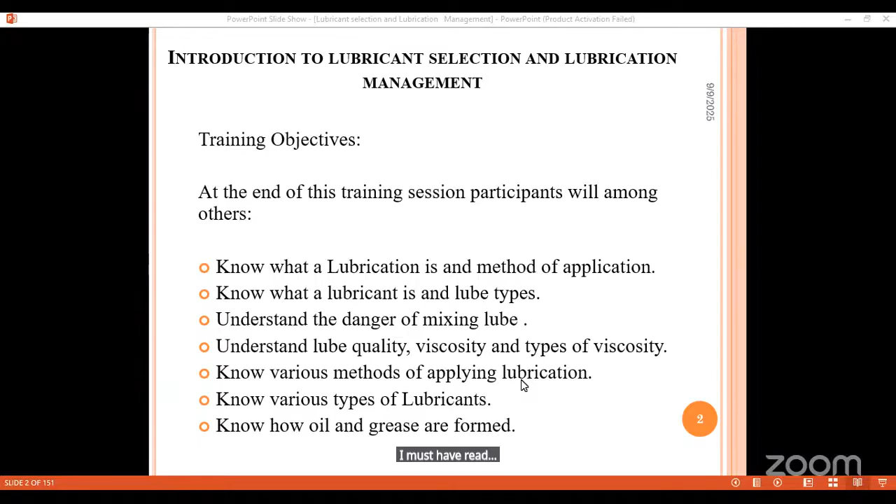Okay, so now, what is a lubricant? Or what is lubrication? Lubrication is the process of reducing friction and wear between moving surfaces in contact.

I will try as much as possible to break every word down so that everybody can understand it. When we say lubrication, we say friction. Friction means that force, that negative force, that retarding force that can make you as if you are going backward. It's like you are running, and maybe the wind is making your effort not count. That is what friction means here.

So there is friction in every machinery that is moving, that is rotating. So in order to deal with that friction, to remove that friction within the lubrication system, to make sure that friction is removed, we are not removing it totally, but we are trying to reduce it. And that process of reducing this is called lubrication.

It involves introducing substances such as liquid, gas, solid, and semi-solid or plastics to the mating area. How do I mean? Why are you saying solid? How can you use solid to store lubrication? We'll explain that later on, right?

Lubrication is the process or technique of using a lubricant to reduce friction and wear and tear in contact between two mating surfaces. Adequate lubrication allows smooth, continuous operation of machine elements, thereby reducing the rate of wear and preventing excessive stress or seizure of the bearings, all right?

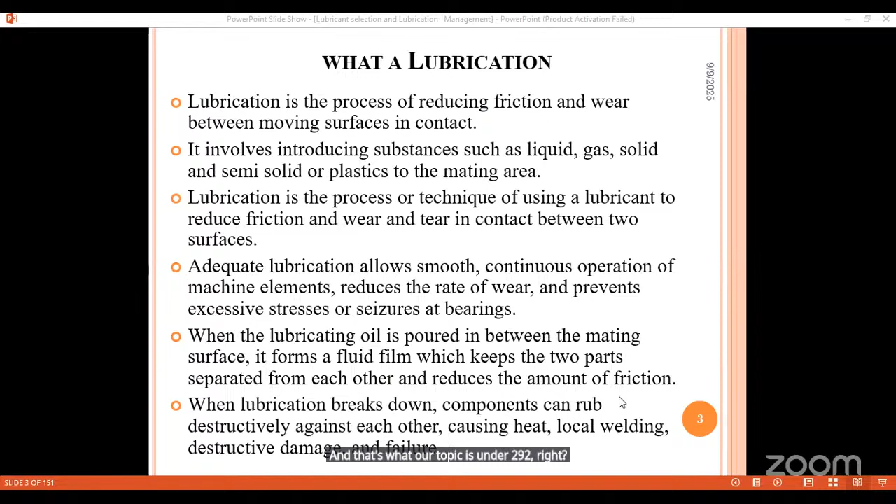Imagine a workplace without lubricants. Machines will grind to a halt, engines will seize up, and progress will stop. In this section tonight, we will talk about the complex world of lubricants, their classification, and selection, shedding light on the crucial role lubricants play in keeping our mechanical systems running smooth.

Hello, someone is talking at the background.

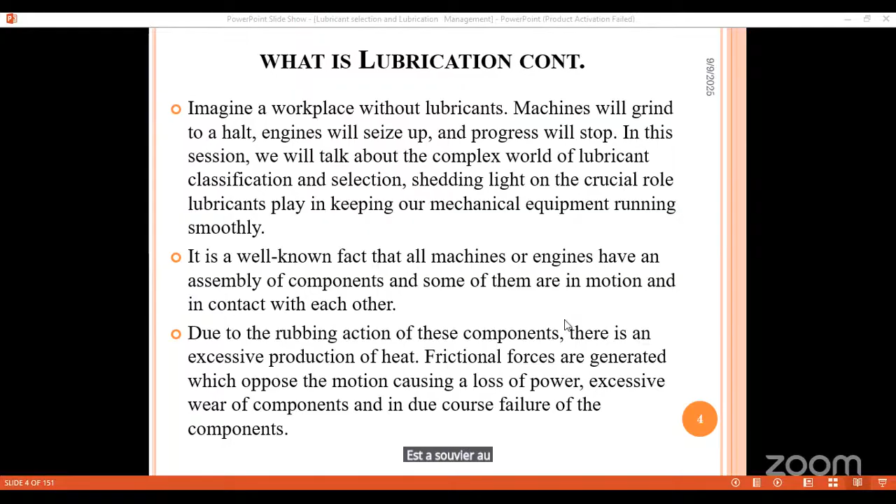It is a well-known fact that all machines or engines have an assembly of components, and some of them are in motion and in contact with each other. Due to the rubbing action of these components, there is excessive production of heat. Frictional forces are generated, which oppose the motion, causing a loss of power, excessive wear of components, and in due course, failure of the components.

What are the functions of lubrication? Why do we talk about lubrication? Why do we use it? Why do we introduce it to our materials in our industry?

The first function of lubrication is it reduces frictional force between moving components. I told you, as if you are a sprinter running, all your energy that you are using to run, you would have gone further, but there is a frictional force pulling you back, which is the air, the wind that you are feeling. That's exactly what friction does to equipment. Equipment that could be running smoothly now has an opposite force doing a background task. If equipment is able to run 100%, we only end up running at 70%. So by applying lubrication, you remove that friction, thereby improving that equipment's efficiency from maybe 75 to 90, if not 100%.

Number two, it reduces the wear and tear of components. Number three, it increases the lifespan of the machine and its components. Number four, it reduces corrosion of the component.

When we say corrosion, what do we mean? Corrosion, to corrode, is the external wearing away of a component. You can easily see this in our vessels, our machines, our metal parts that are exposed to salty water, or even those under the atmosphere. This everyday dew rests on your machinery, and the next day it dries when sun is shining. What is happening? There will be gradual corrosion. If you park your vehicle for a long time without driving it, water entering every morning in the form of dew and drying up will be corroding it. That is the external wearing away of the components.

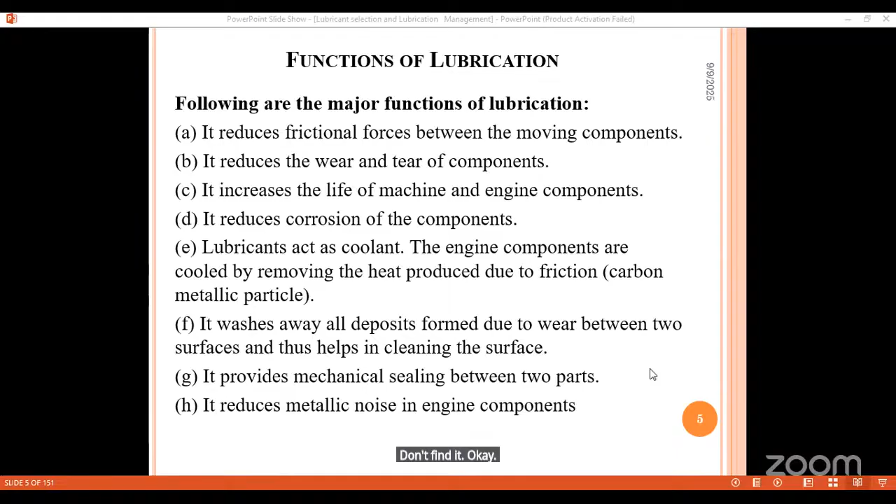Then we are seeing the principle of lubrication. When the shaft is at rest, hello? I'm asking. Okay, here. Okay.

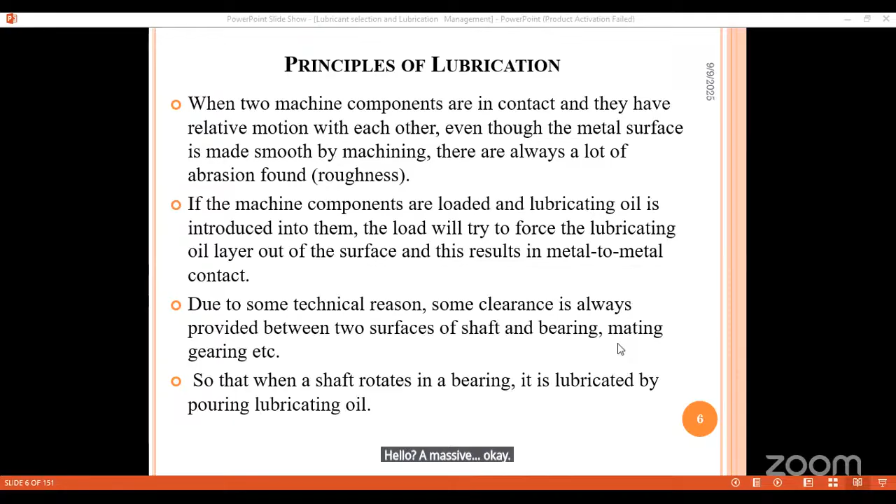Can you hear me? When the shaft is at rest, that means you have the shaft inside your bearing, inside your bore at a horizontal level, a horizontal shaft. To us, we think the shaft will stay at the middle. No, it does not always stay at the middle.

It will not stay at the middle. I'm trying to exaggerate how it looks like. A shaft and a bearing, the hole there that you are seeing, even though you think you are forcing it in, there's always some level of clearance, what they call tolerance fit. That is what is created during the design phase.

The purpose of that is to make sure during operation, that place will permit the entrance of your lubrication. So when the work is not being done, when the equipment is in the off position, all your lubrication will go to the sump, for example. None will remain there. The shaft will rest on the basement of your hole until you start again.

By the time you start the equipment, the oil will, through the help of a pump or any other means of feeding the lubricant, tend to fill this space. Because as you start the machine, as the shaft is rotating, it will lift itself up from that basement to almost at the middle, thereby creating the clearance.

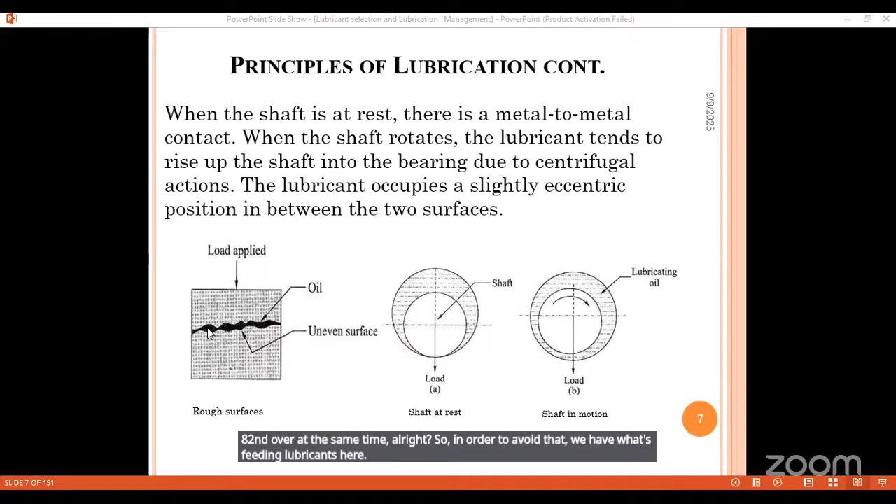Then understanding lubrication. Different substances can be used for lubrication on surfaces, but oil and grease are the most common. Grease is composed of oil and a thickening agent to obtain its consistency, while the oil is what actually lubricates the system. Oil can be synthetic, vegetable, mineral, or a combination of these. The application determines which oil, commonly referred to as base oil, should be used.

In extreme conditions, synthetic oils can be beneficial. What does this mean? This synthetic oil, some call it chemical oil. What about the rest? Oils are more of mineral, the one you mine from crude oil that you refine in your refinery. That is mineral. When you see mineral, that's mine.

Why is this vegetable oil the natural oil? Actually I would have used the term natural oil here because it's a combination of both the nature of vegetable and animal fats. Like palm kernel oil, the one we use in the village that they call ori, is under this group. Then other vegetable oils like avocado pear, rapeseed, and other vegetables, even palm oil, fall into this vegetable oil group.

Then in extreme conditions, synthetic oils can be beneficial. What this means is there are some equipment...

There are some equipment that you cannot use normal mineral oil for. Instead, you go for synthetic oil, because at extreme conditions, when temperature is very high or very low, mineral oil will fail you. They will not do the work of lubrication again. So you need a synthetic oil that is prepared specially to meet that condition.

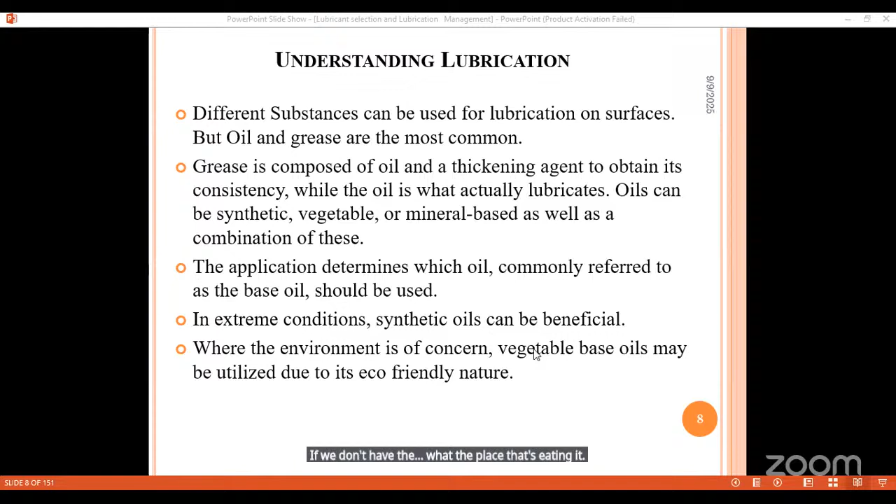The method of lubrication: apart from proper selection of the right lubricant for a specific purpose, an effective method of applying this lubricating oil is also necessary for any machinery. For example, we have four here, but later we'll talk about more, since there are more than four. At this level, let's use manual lubrication, gravity feed lubrication, force lubrication, and splash method lubrication.

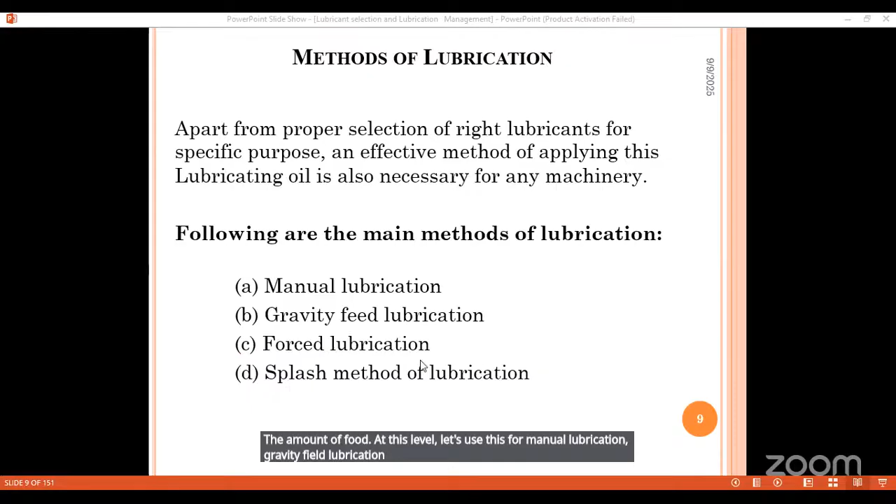This is manual lubrication. Manual lubrication by oil can, where you put the oil in your small container then spray it, comes under this category. Also, application of grease by brush and other means by hand falls into this category.

Then gravity feed lubrication: in gravity feed, lubricants are supplied by gravity. You put this oil on top of where you want to feed it, through an orifice under the can that houses your oil. As the machine is working, the oil will come gradually in a controlled way, so that the quantity you want will just be entering. Sometimes in your machine shop, this is what they use for gravity feed.

The force lubrication: in force lubrication, the lubricating oil is supplied at high pressure by an oil pump. This is what we use in our vehicle, in our motor engine, in our turbine and other things - we call it force lubrication. The oil is at the sump underneath the engine, and where this oil is needed is on top of the engine, so you need a pump to give it energy or momentum to rise until it gets to the gallery where it's needed. They then fall back to the sump again.

Then the last one, splash method of lubrication. This one is also found in your engine, in the form of an oil bath. As your engine is rotating, there is something connected to your crankshaft, like a dipper. It dips itself into that place and scoops the oil up. As it scoops it up, it makes the oil circulate around the periphery, around the engine crankshaft, around your connecting rod, and those other components you cannot see easily, facing down, even up as far as the piston area. It flushes the oil upward, and the oil will just go up and come back. That's what we call splash method of lubrication.

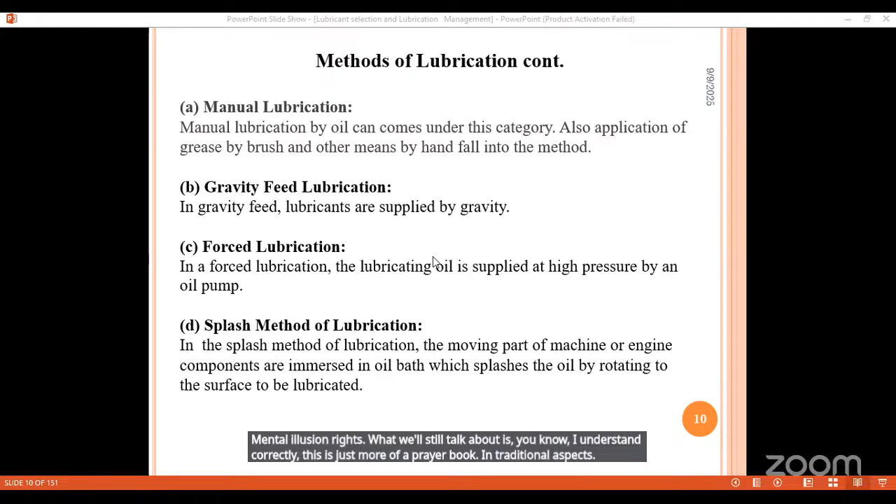Then during the course of our training, there are some terms we'll be using more often.

Hello? Hello? We can hear you, sir. Yes, I can hear you. Okay, we can hear you.

As I was saying, during the course of our training, there are some terms we'll be using more often. These are lubrication terms or more engineering terms, or technical terms. The first one is tribology. When we say tribology, it means the study of friction, the study of lubrication, and the study of wear.

That is three, 'tri' means three. So tribology covers lubrication, friction, and wear. When you combine those three together, studying them at the same time, they can call you a tribologist.

Then friction is the force resisting relative motion. I told you just now, when you are running, that tends to pull you backward. That's not allowing you to have 100% of your energy. That's what we call friction.

Then we have three kinds of friction: sliding friction, rolling friction, and fluid friction. The sliding is the most dangerous. When you have two flat surfaces coming together, they are sliding.

When they slide, they are grinding on each other. Slide means to move forward and back, for example, move front and back, move front and back. So there will be direct contact of the two objects or the two flat surfaces, and they generate the highest form of friction.

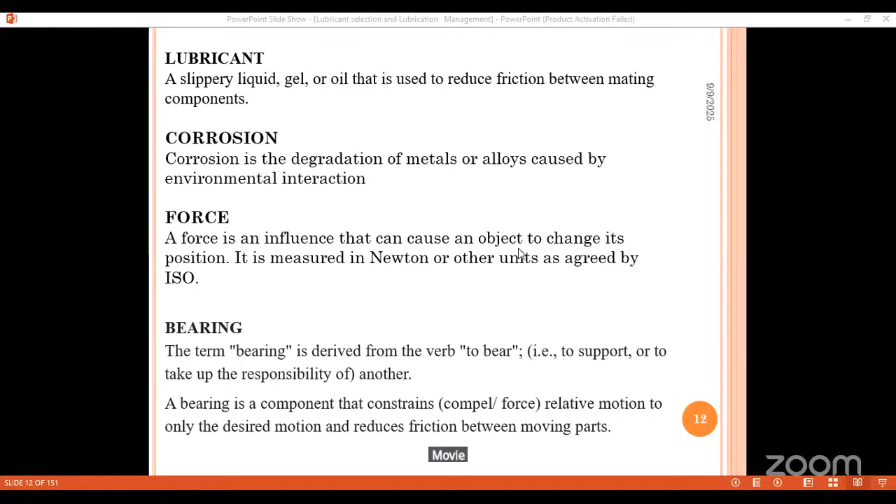Then viscosity. We'll deal with this more later as a topic on its own. At this level, viscosity is a measure of fluid resistance to flow. Viscosity and friction are almost in the same family. The measure of resistance is friction, but the measure of that friction is viscosity, right?

Then viscosity index. This talks about the behavior of your lubricant over the temperature range. Maybe at 10 degrees, how does your oil behave? At 20 degrees, how does it behave? At 100 degrees, how does it behave? That range, that behavioral pattern, that description of oil behavior is what we call viscosity index. We're going to talk about it later.

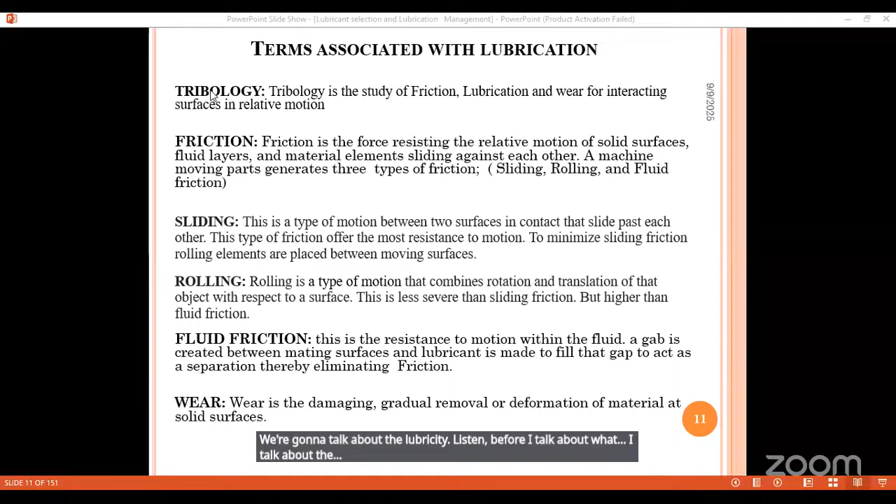Then lubricity. Before I talk about tribology, I'm using another term again, lubricity. Lubricity is the measure of the reduction in friction and wear by a lubricant. The measure of the reduction, right?

If I put oil, I told us that we start with sliding friction. When I reduce sliding friction by applying a roller, what have I done? I want to reduce the friction. The time I use oil again, what have I done? I also want to reduce the friction further. Then if I use this oil, they have grade by grade, so there are some that are far better in terms of friction reduction. That measure of the oil's capacity in reducing friction is called lubricity. Hope that is clear.

Then velocity gradient, or shear rate: the ratio of velocity to the separating distance of the mating plates.

Two plates, when they slide, there's a velocity, but the ratio between the sliding of that plate and the distance separating those two plates is what's called the shear rate or velocity gradient.

Additives are substances that are added to another substance in order to improve their performance or to preserve them. So when we talk about grease and oil formation, we also use some of these additives.

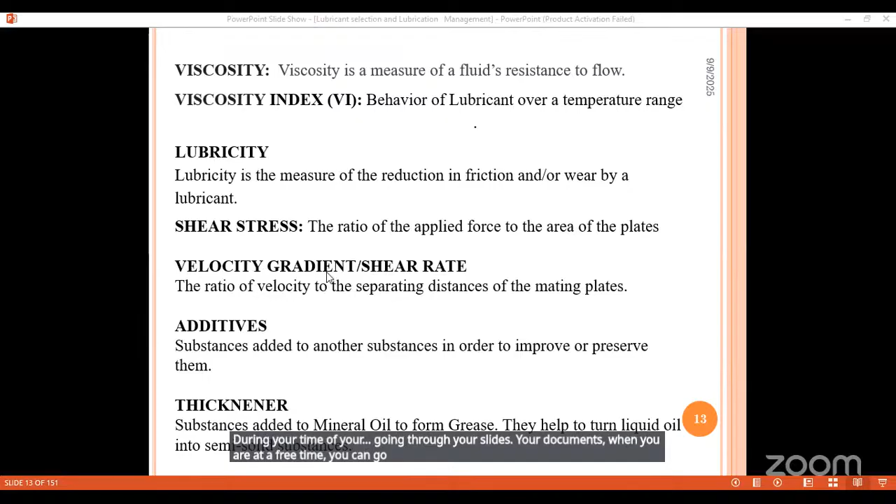The next one is: what is a lubricant? We've talked about lubrication, now we're talking about lubricants. A lubricant is a substance that helps reduce friction between two meeting surfaces, thereby reducing the heat generated when the surfaces move and stopping mating components from rusting, that's corrosion, often shortened as lube or lube oil. The process of reducing friction is known as lubricity.

We are going to look at lubricants from several points of view as follows: brief history of lubricants, classification of lubricant, composition of lubricant, and selection of lubricant.

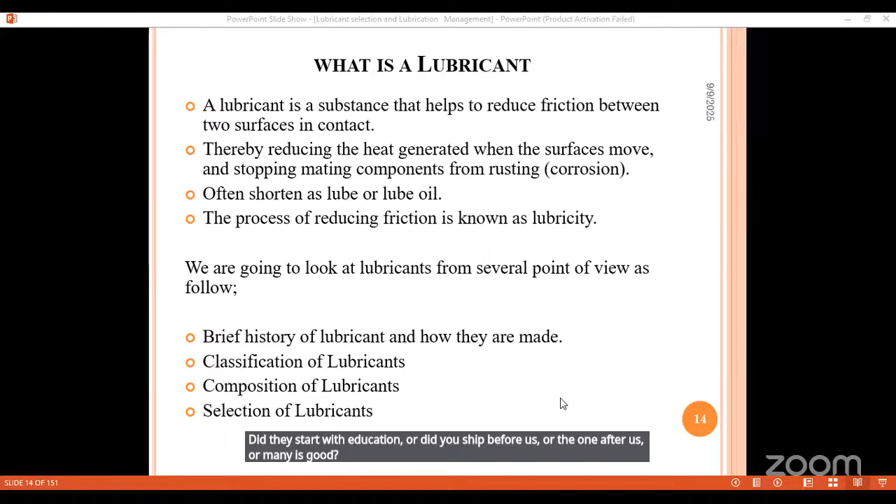The first one is the brief history. Let's talk about the brief history. How did it start? Who were those that started it? Did it start with our generation, the generation before us, or many years ago? Yeah, from this history we'll talk about it. So, a brief history of lubricants.

How it all started: lubricants have been in use for thousands of years, knowingly and unknowingly, used consciously and unconsciously. As far back as 1400 BC, before the birth of Christ, we were already using lubricants. Imagine, chariots were lubricated using calcium soaps back then.

Then palm oil and other ancient lubes were used during building, to slide stone on oil-impregnated wood poles, in the time of the pyramids of Egypt. In the Egyptian days, when the Egyptians were the world power, they used palm oil as a means of making their job easy during the building of their pyramids. They might not even have known what they were doing, but they were using palm oil as their source of lubrication.

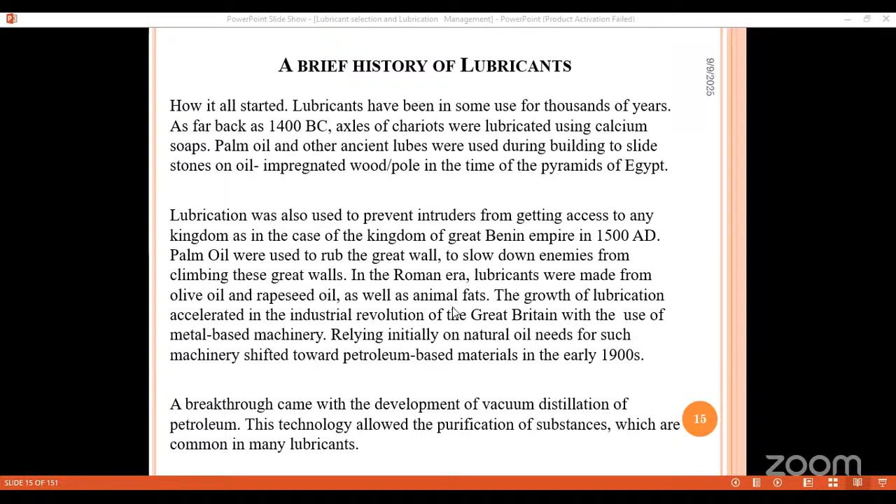How are lubricants made? Typically, lubricants contain 90% base oil. When I say base oil, I mean mineral oil from crude, all right? And 10% additives. What is additive? Those things I told you that additive means those things you add to another thing to improve their performance. Base oil alone cannot serve the purpose of a lubricant. You need something else added to it. So that's where additive comes in. This additive can come in different shapes and different forms, right?

Then the next one is what? Vegetable oil or synthetic vegetable oil, or synthetic liquids are sometimes used as base oil. Then you bring this and add additive to it. Once additive is added to it, it becomes a lubricant, right? Additives are added to reduce friction and wear.

So the base oil cannot reduce friction and wear. So you need to add additive in the right percentage, in the right ratio, to increase viscosity, that is its ability to reduce friction, to improve the viscosity index, its ability to withstand temperature and pressure, to cause or create resistance to corrosion, oxidation, aging, and contamination.

When you talk about corrosion, I would have used the word erosion here instead of corrosion, because this is what happens inside the structure. When there's wear on the outer surface, it's corrosion. When there's that same wear inside the surface, it's erosion. As in, I'll use a pipe for example. That external attack on the pipe is corrosion, but the internal attack on the pipe is erosion. So that's what this one does.

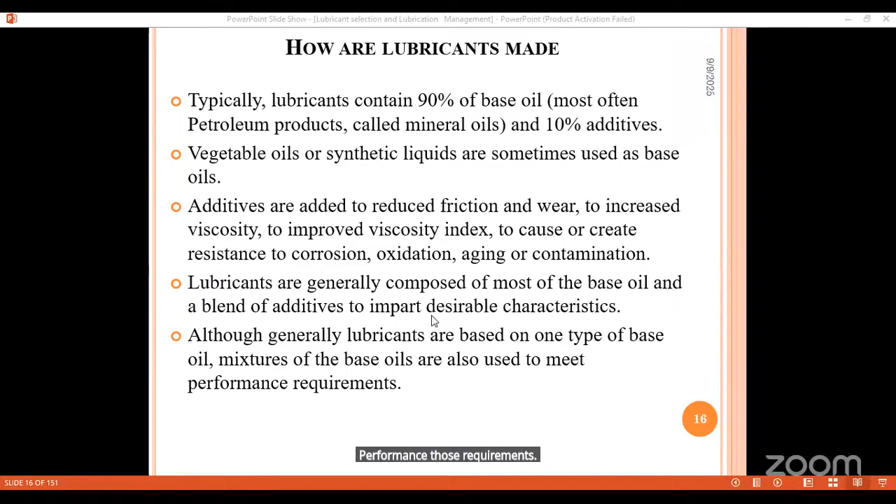Classification of lubricants. Now, lubricants can be classified into 4 distinct categories based on their physical state. The first on the list is liquid lubricants. The next one is semi-solid lubricants. The other one is solid lubricants. And finally, gaseous or gas lubricants. But I think we'll talk more about liquid and semi-solid. The other two, if there's time, we'll also talk about it, right?

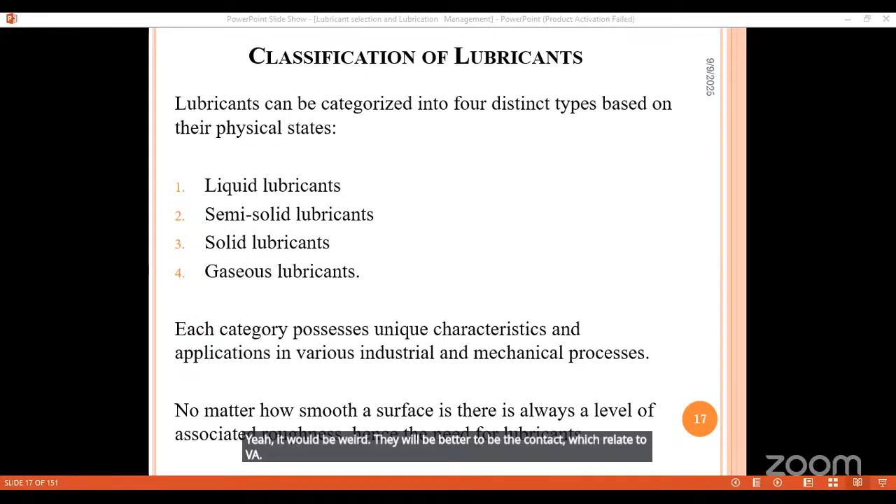Each category possesses unique characteristics and applications in various industrial and mechanical processes. No matter how smooth a surface is, there's always a level of associated roughness, hence the need for lubricant. No matter how smooth a surface is, it's only smooth to some degree, maybe 99%, never 100% smooth. That makes it necessary or wise for us to introduce lubricants, because if surfaces were 100% smooth, you would not need lubricants. Because it's not 100% smooth, if you don't apply lubricant, that little degree of roughness will lead to contact, which will lead to wear or deformation or degradation of the metal.

So what I just said to you in diagrammatical form is explained like this. Lubricants: we have solid, semi-solid, liquid, and gas. Under liquid, we have natural oil, mineral oil, and synthetic oil. Under semi-solid, we have grease, just grease in that category. Under solid, we have copper and liners.

This is a liner, like the liner bearing you've heard of before in your crankshaft, in your connecting rod. Those bearings, even the spacers, are Teflon spacers. They fall into this solid lubricants category, along with aluminum. Then for gas, we have air, nitrogen, and helium. These are the three major types of gas lubricant.

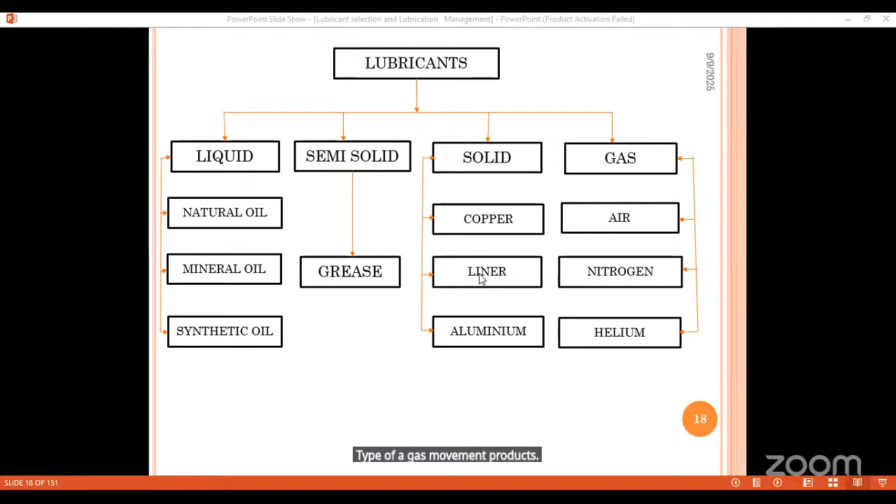Copper, liner, and aluminum are the major kinds of solid lubricant, while grease, under semi-solid, is just grease.

Then for liquid, we have natural oil, like natural vegetable oil, your avocado pear, your honey, your animal fat, even your palm oil, the one they call ori, they are under natural oil.

Then your mineral oil, your normal 20W50, 15W40, your azo oil, they fall under mineral oil. Then synthetic oil, these are chemically formulated oils, like your synthetic hydrocarbon, SH, those hydrocarbons made through combination, through chemical mix, fall under synthetic oil.

Then we'll talk about this, and if there's time, we'll talk about this and this also. All right, they'll call it that.

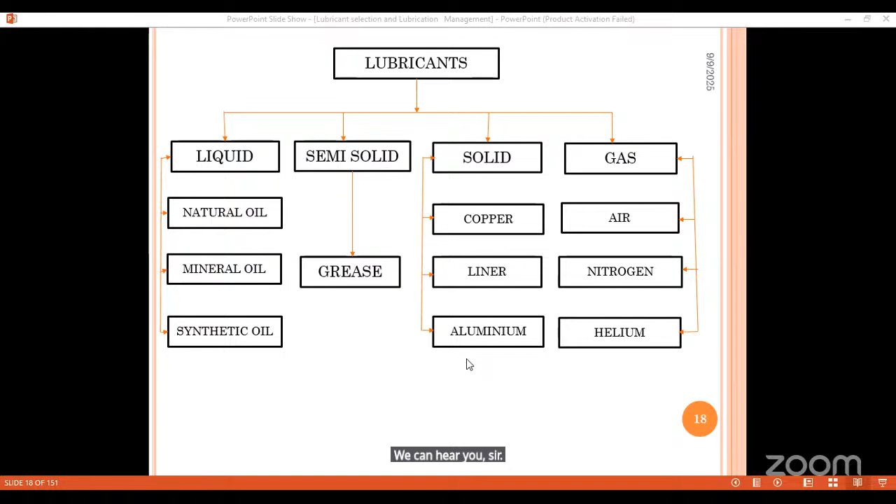We'll start with liquid lubricant. What is liquid lubricant? Liquid lubricant represents the most widely used category of lubrication materials in industrial applications.

This includes, first on the list, mineral lubricating oil, which I told us about. Then synthetic lubricating oil, and bio-based or natural oil, which is animal or vegetable.

The water-based one, because sometimes most of us also work in the turning stage of machinists, machinists use water-based lubricants most often. You get a fluid and add more water to it to suit your cutting purpose.

But the first three are used most often in the oil and gas industry. The water-based one is also used, but it's not common in oil and gas; rather it's used in the machine shop. Whether in the machine shop or oil and gas, they are all lubricants.

The liquid lubricants are commonly used due to their broad viscosity range, enabling precise selection for mechanical components operating under varied loads, speeds, and temperatures. This versatility allows for optimized lubrication across industrial processes and machinery.

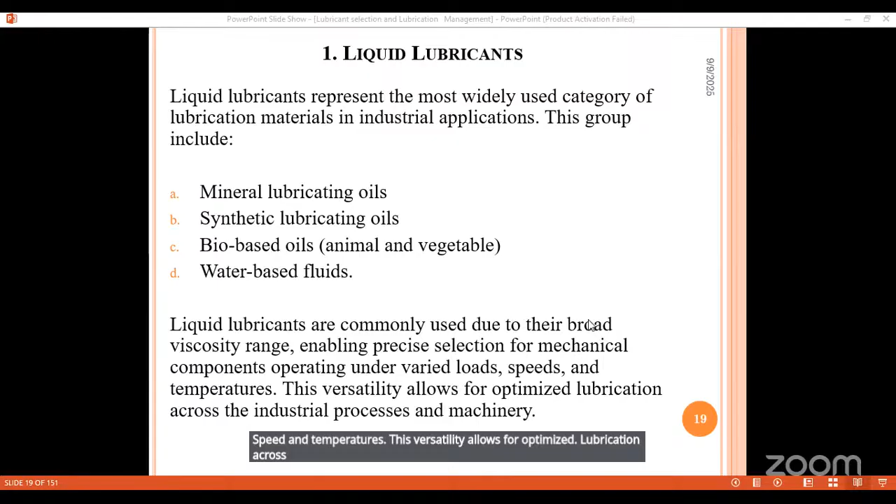The first on the list was mineral lubricating oil. Currently dominating the market, mineral oils account for approximately 90% of total lubricant volume. They are derived from crude oil, and these oils are formulated by blending refined petroleum products with performance-enhancing additives.

The additives typically include anti-wear additives. You add anti-wear to your lubricant, to your oil, to help stop the rate of wear, to minimize it.

We have antioxidant additives, which help fight against the formation of ferrous oxide, when iron mixes with oxygen it becomes ferrous, and that ferrous iron is very dangerous, not good. We want the iron to remain as iron, the metal to remain as metal. To achieve that, you add antioxidant additives to your base oil.

Then the next one is corrosion inhibitor additives. This helps fight corrosion, reducing the rate of corrosion when added to your lubricant.

The other additive is viscosity modifier. This modifier helps extend the life of your engine oil in your vehicle. For example, some engine oils can only withstand a 30% temperature increment, but with the introduction of viscosity modifier, the oil can withstand higher temperatures, even as high as 84 degrees Celsius. That's what this one does, and it helps tailor the oil's properties to specific applications.

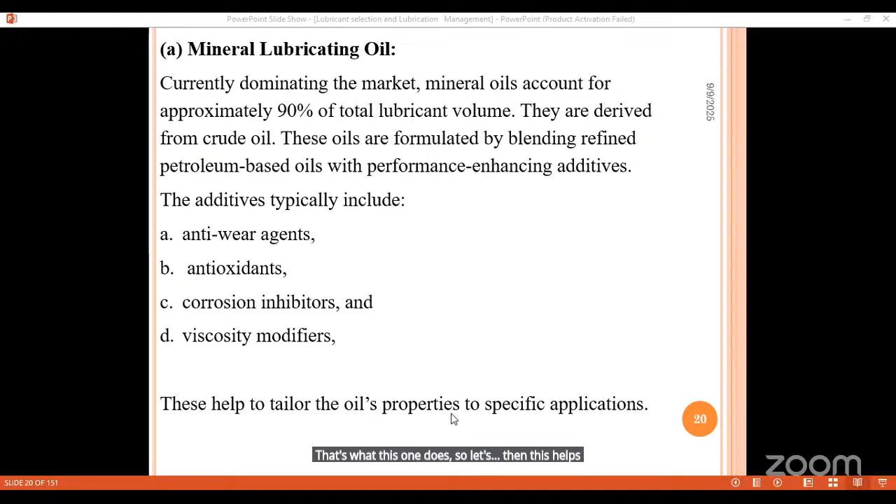Then the next release was synthetic lubricating oil. Synthetic oil is a lubricant consisting of chemical compounds that are artificially modified or synthesized. Synthetic oil is used as a substitute for petroleum refined oil when operating in extreme temperature. Synthetic oils offer superior lubricating performance characteristics compared to mineral oil.

Yes, when you talk about extreme temperature, like extremely cold or extremely high, where your normal mineral oil will break down, that's where synthetic oil finds its usefulness. There are advantages of using synthetic oil over mineral oil.

The first one is better at low temperature and high temperature, that is when the temperature is very cold or very high. Then viscosity performance helps improve the oil performance. Then better higher viscosity index helps improve what the additive does in your base oil. Synthetic oil can do better when you're using synthetic oil.

Then chemical and shear stability. No matter the condition, it will not allow the surface of your metal to start pitting, wearing, rusting, or corroding. All right, that's what the method is talking about.

Then it has some disadvantages. Anything that has an advantage must have some demerits. One of the demerits is that synthetic oils are more expensive by volume than normal mineral oil. They can decompose easily. They are more expensive because they are chemical. They can easily decompose, but they're not natural. They are artificial. When you say synthetic, it means artificial.

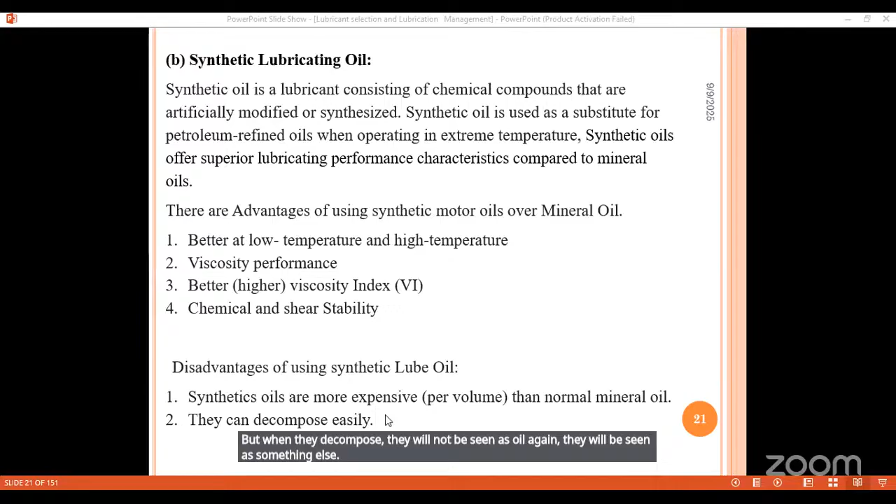All right, because they're artificial, yes, they will do what they want to do, but they will end up creating another problem. When they decompose, they will not be seen as oil again, they will be seen as something else. We'll talk about that later also, yeah?

Then bio-based. This one talks about vegetable oil and natural oil, right? Made from animal fats or plant sources. These environmentally friendly lubricants are gaining popularity due to their biodegradability and renewability. Rapeseed, soya beans, palm oil are common vegetable-based lubricants.

Bio-based lubricants have been found to exhibit superior properties over conventional mineral oil. Imagine that. With renewability and biodegradability being their strongest suit, they are also eco-friendly.

When you say eco-friendly, even when you eat it, it doesn't harm anybody. Even if it comes into contact with your body, it will not harm you. Even if it's on the environment you're working in, it's eco-friendly. It will not harm or pollute the environment.

That's what I'm saying. Even if during the course of your work it started raining, and they push it to the high sea, it will not kill your fish. It's eco-friendly, all right, that's what I was saying.

Then water-based fluids. This lubricant incorporates water as a key component, offering excellent cooling properties and fire resistance. I told us that this one is used mainly in our machine shop.

They are categorized into two main types: solution types, water-soluble compounds dissolved in water, e.g. glycol solutions. That thing you see when you say glycol, that's a chemical or liquid that you see inside the gauge, inside the pressure gauge or temperature gauge.

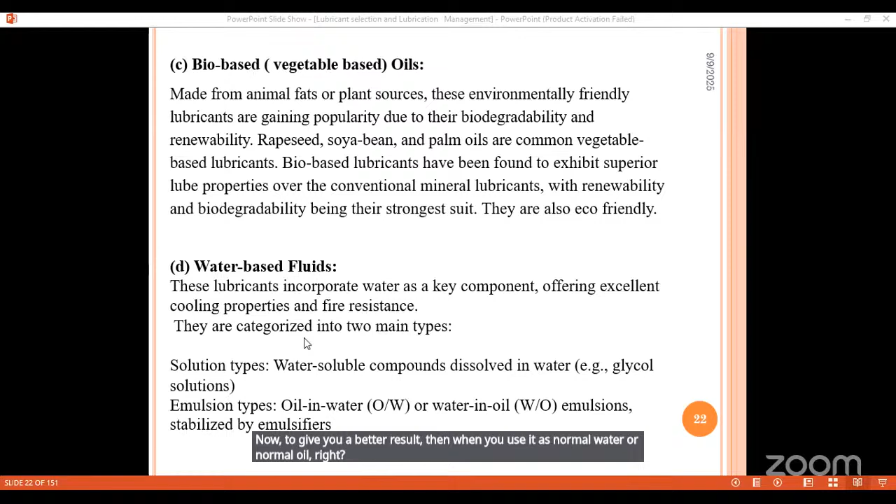Then the next on the list is the second type of lubricant: semi-solid lubricant, otherwise known as grease. Only grease is in this category. Semi-solid lubricants, commonly called grease, exhibit a unique consistency between solid and liquid states at standard temperature and pressure.

Sometimes this grease, you see it as liquid lubricant, sometimes as a solid lubricant. That's why it's called semi-solid, or semi-liquid, because it's in between. In fact, the first three classes of grease are actually semi-liquid, more like liquid, they can flow. While the last 6 are semi-solid, more like solid, because they don't flow.

These lubricants are characterized by their mixture structure, typically consisting of a thickening agent spread in a liquid lubricant base oil. Grease is actually a liquid lube mixed with a thickener at the right proportion. They are liquid, but when you add the thickener, it makes it thick, to become either semi-solid or almost solid, depending on the proportion added. While liquid lubricant only has base oil and additives, grease has base oil, additives, and thickener mixed to form semi-solid substances.

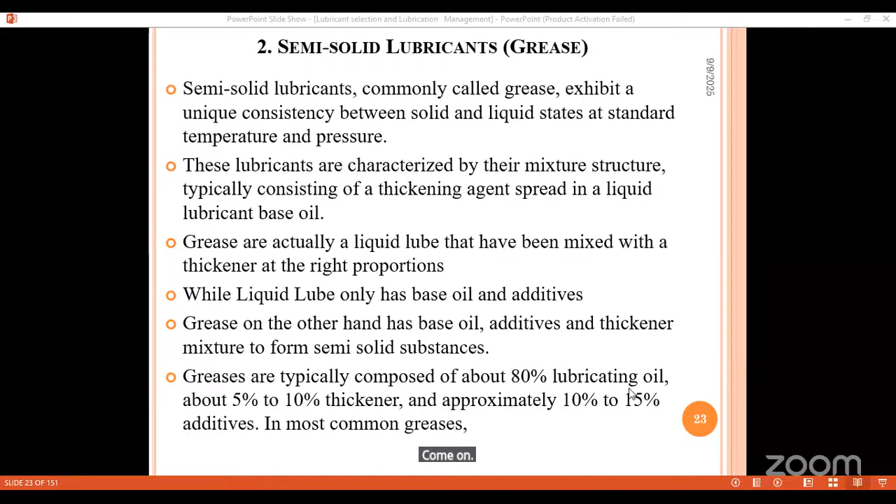To prevent drying out at high temperature, dry lubricants are also added. By selecting appropriate oils, thickener, and additives, the properties of grease can be optimized for a wide range of applications. These greases are suitable for high or extremely low temperature, vacuum application, water resistance and waterproof grease, highly pressure resistant or creep-resistant types, food grade, or exceptionally adhesive greases.

During the mixture, the right proportion of your oil, additive, and thickener will determine what function or role your grease will play in machinery preservation. So if you need it to carry away excessive heat, there's a way you mix those 3 components together. If you need it to stop corrosion, there's a way you mix it together. If you need it to carry excessive load, there's a way you also mix it together.

Grease possesses several key properties that make it irreplaceable. Up to now, we still use grease because of these properties. First, adhesiveness - its ability to adhere to metal surfaces provides excellent protection against wear and corrosion. When you put grease in your equipment, you wouldn't expect that when the equipment is working, the grease will just throw away. It will not throw away - that's a good quality of grease, and that is possible because of the thickener you're adding. That is what we call adhesiveness.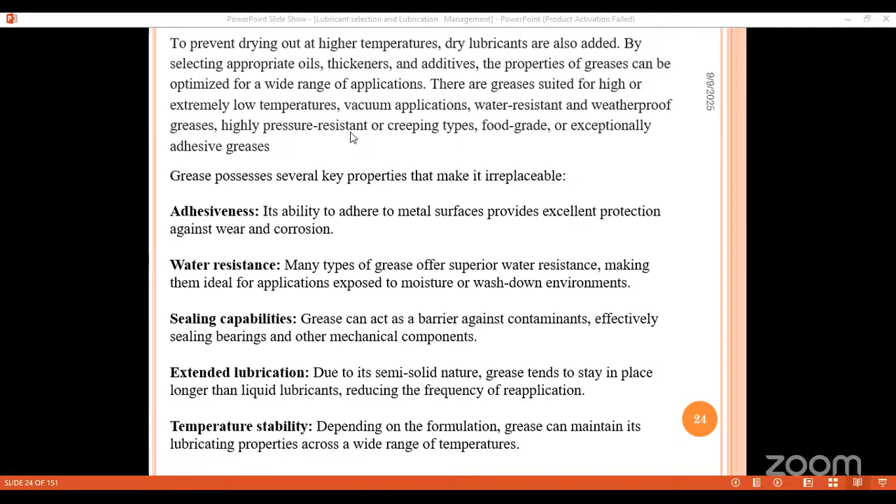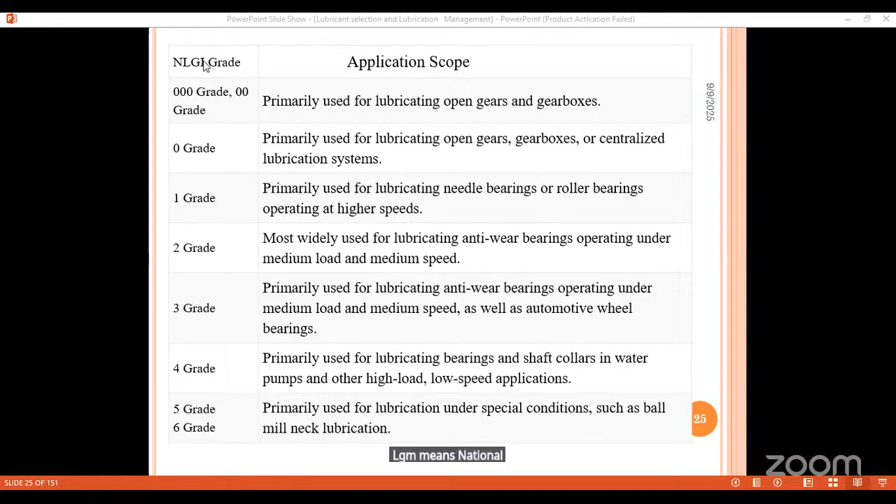These are the types of grease. NLGI means National Lubricating Grease Institute. These are the institutions that regulate the formulation of grease, right? They give us a table or chart where we can mix our oil, additive, and thickener in the right proportion. So when you follow that table, you get all these grease grades, from 000, 00, 0, up to 6. These are the various grades of grease you have, right?

From the first ones, 000 and 00 grades, then 0 grade up to 1 grade - these are the more liquid, semi-liquid base greases. Then from 2 down to 6 are actually semi-solid base greases. So what am I saying? When grease is in this 0 range, you call it EP0 or EP1 - extreme pressure 1, extreme pressure 2, 3, 4, 5 and 6. But when it is EP0 or EP1, that's the liquid-based grease. When it is EP2 up to EP6, that's the solid-based grease.

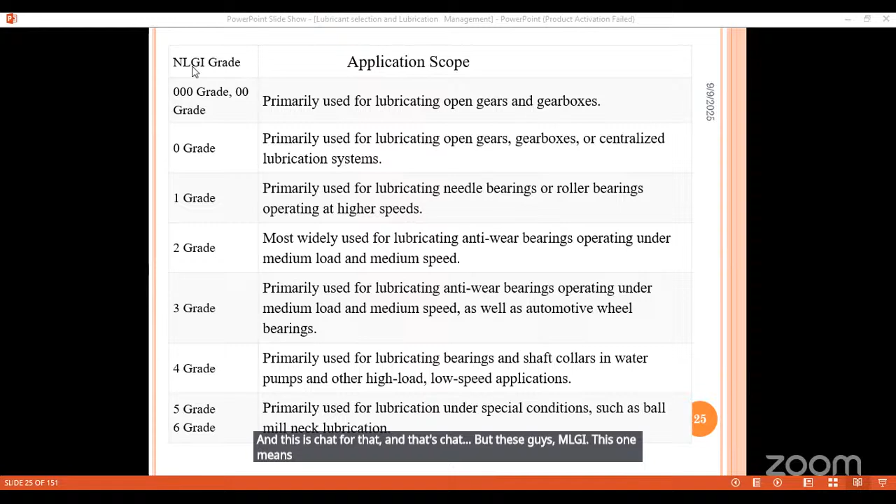They don't have where they are used, and there's a chart for that. That chart was designed by NLGI, which means National Lubricating Grease Institute - N means national, L is lubricating, G is grease, I is institute. They are the guys that gave us what we call a flyer now, where you can do your selection. Then let's go to the next page.

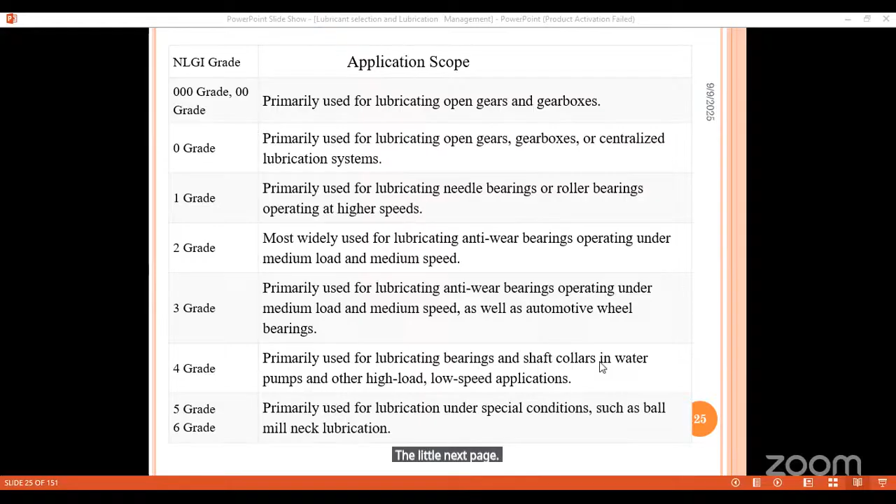The consistency of grease is typically classified using the National Lubricating Grease Institute system I've talked about. Grease ranges from 000, very soft, to 6, very hard. Very soft is more of a liquid, and very hard is more of a solid. This classification helps engineers and technicians select the appropriate grease for specific applications based on factors such as operating temperature, load, and speed.

The next type of lubricant is solid lubricants. Solid lubricants are solid substances that can effectively separate the surfaces of two bodies and thus reduce both friction and wear. These solid lubricants find extensive use in aerospace, automotive, and heavy industry sectors, where they often outperform liquid lubricants under extreme temperatures, pressure, or environmental conditions.

Solid lubricants find application in various industries, particularly in environments where liquid lubricants may not be suitable, such as high temperature and vacuum conditions. They are usually referred to as metal bearings in internal combustion engines, your ICE. Cones or spacers and even bearings sometimes serve as a solid lubricant.

When you say this is a cone, this is a bearing cone. This is your liner bearing inside your engine, that's your engine bearing, engine crankshaft bearing. That looks like a half plate, a circle plate that you put before you put your connecting rod in your crankshaft. It is a form of solid lubricant.

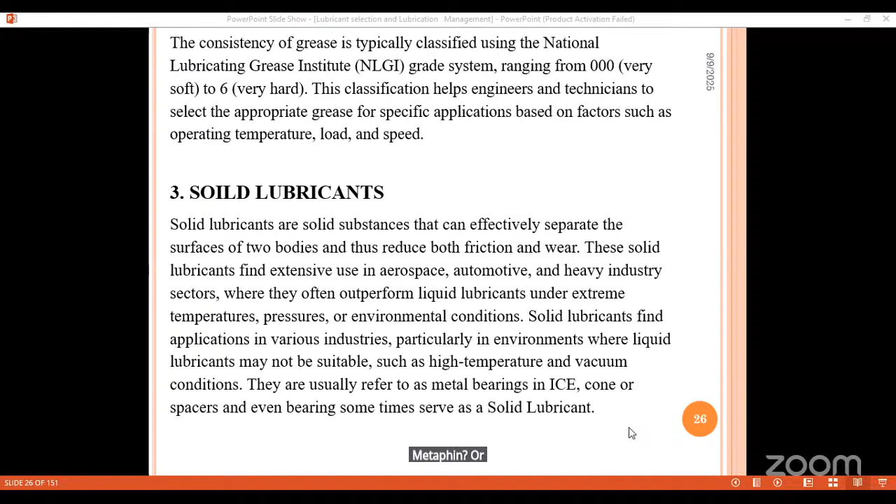Then the next one now is your gas lubricant. Gas, when we say gas lubricant, is everywhere, even in your hand. When you rub your palms together, as you are clapping, there's a lubricant in between your hands - that is gas lubricant. You are trapping the air, and your air contains helium, nitrogen, oxygen, carbon dioxide, and others in the right proportion.

But in engineering, we say gases are compressible fluids. They adhere to the principle of fluid dynamics and lubrication theory. This enables them to function as effective lubricants under specific conditions, similar to liquid lubricants.

The advantages of gas lubricants are as follows. One, exceptionally low friction coefficients, often an order of magnitude lower than liquid lubricants. Two, minimal frictional heat generation at high rotational speed, crucial for precision machinery. Three, negligible temperature increases during operation, maintaining thermal stability.

Remember, I told us that lubricant does many jobs. Apart from friction reduction, it carries away heat, am I right? Because it carries away heat, for example when your vehicle is moving on the road, especially your engine, even though you have your cooling system in your machine that carries away your excessive heat.

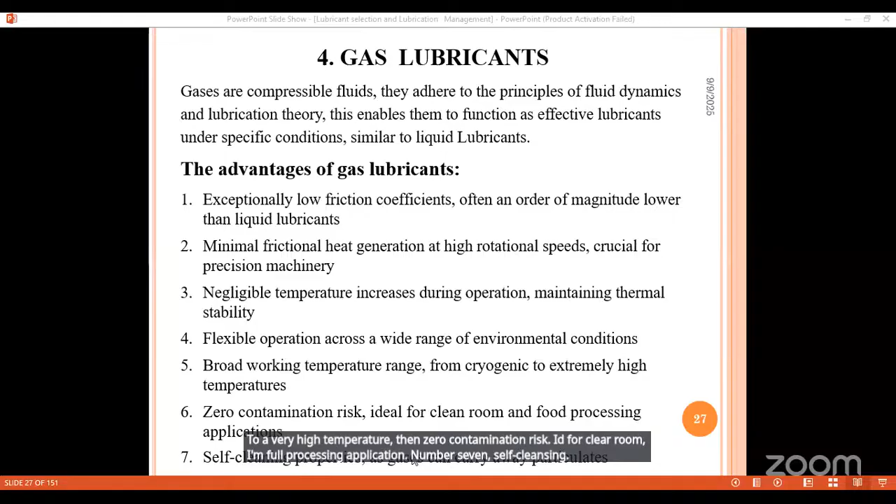As I told us, anything that has merit also has demerits. Anything that has a good side must also have a bad side. So these are some of the limits of using gas lubrication. The first one, low density and viscosity, resulting in reduced load-bearing capacity compared to liquid lubricants.

Limited application range, typically suitable for pneumatic devices operating within 30 to 70 kilopascal, and hydrostatic bearings not exceeding 100 kPa. The third limitation is higher precision requirements in bearing design and manufacturing to maintain thin gas films, with potential for instability at high speed or under fluctuating loads.

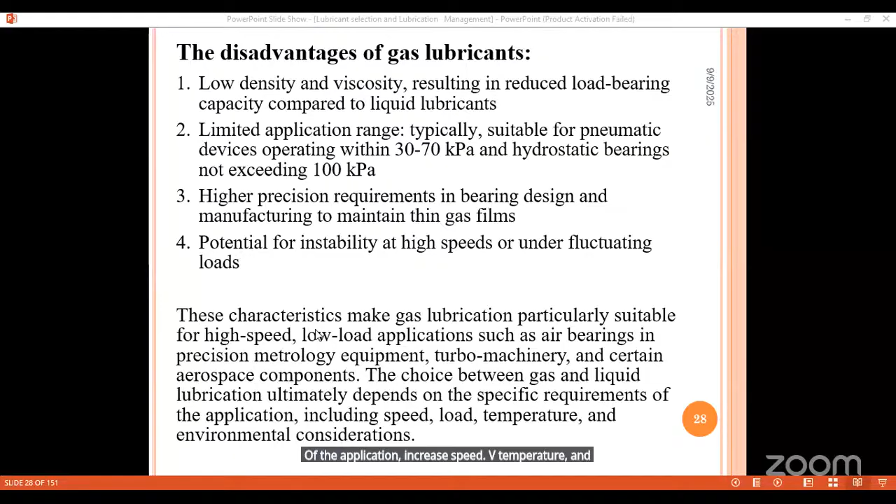This characteristic makes gas lubrication particularly suitable for high-speed, low-load applications, such as air bearings in precision metrology equipment, turbomachinery, and certain aerospace components. The choice between gas and liquid lubrication ultimately depends on the specific requirements of the application, including speed, temperature, and environmental considerations. So we'll go to the next topic now.

Composition of lubricant. I told us during our introductory stage that lubricant consists of 3 things: base oil (or natural oil, or synthetic oil), then additives and thickener. Then the first one, base oil.

Base oil is the fundamental component of every lubricant, typically consisting of 80% to 95% of the total volume, and serves as the carrier for performance-enhancing additives. Base oils are broadly categorized into 3 main types: natural oil, mineral oil, and synthetic oil.

Am I right? Natural oils are animal fats and plant extracts. Mineral oil, these are mineral oils like 0W40. The one oil you use in your car, the one you use in your house, in your gearbox, the one you use in your industrial plants - that's all mineral oil.

Then synthetic oil. This is your hydraulics that you use in running your hydraulic equipment. Most of those oils are under this synthetic oil category, right?

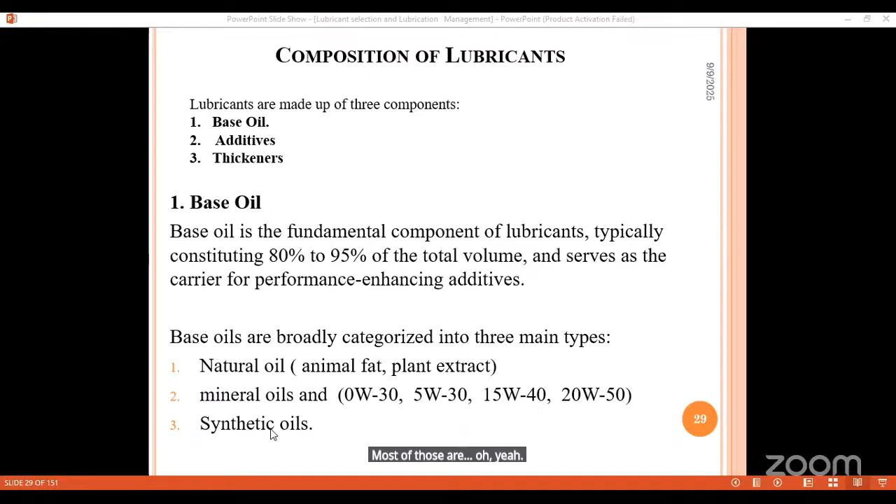Under this base oil now, mineral oil derived from crude oil through a refining process is classified in most countries, including ours, into 3 primary categories based on their molecular structure and properties. We have paraffin, naphthenic, and intermediary. When you say intermediary, that means a combination of paraffin and naphthenic makes your intermediary oil.

When you say paraffin oil, these are oils characterized by high viscosity index, good oxidation stability, and low pour points. Whereas naphthenic base oils are known for excellent low temperature fluidity and good solvency for additives.

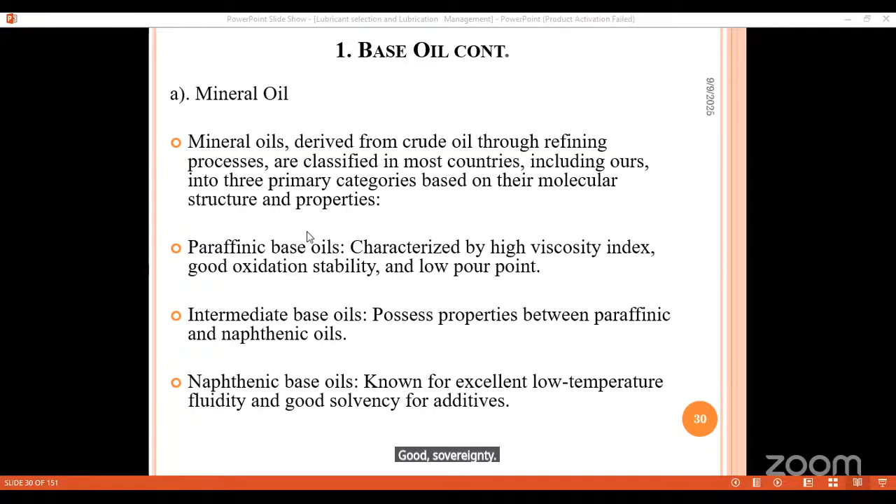I think I should go to the next page. I've already talked about this before. Synthetic oil is a lubricant consisting of chemical compounds that are artificially modified or synthesized. Synthetic oil is used as a substitute for petroleum refined oil. Synthetic-based oils are engineered through controlled chemical reactions, resulting in molecules with specific desired properties.

The advantages of synthetic oil over mineral oil are these. The first one, higher chemical purity and molecular uniformity, superior thermal and oxidative stability. It can withstand any form of heat or coldness, and it doesn't permit your metal to form any other compound when it meets with the oxygen in the system, right?

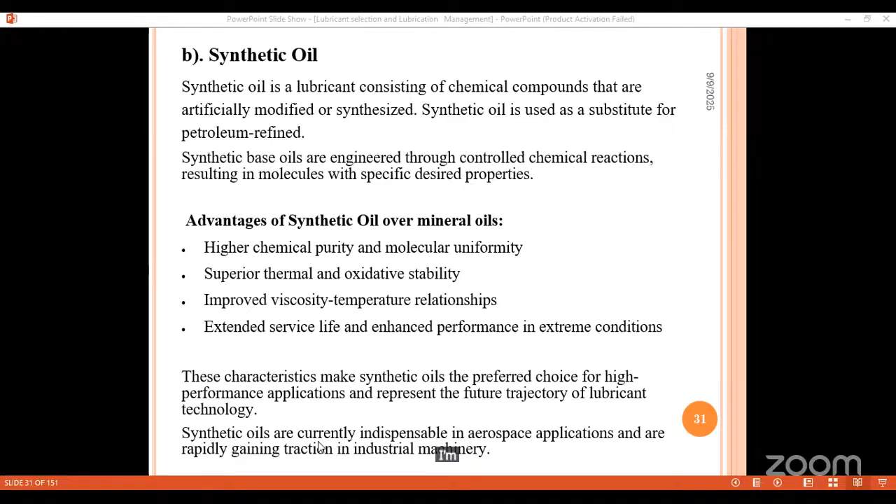The improved viscosity temperature relationship, extended service life, and enhanced performance in extreme conditions. And we told us that the only challenge is that they are very expensive compared to other oils. This characteristic makes synthetic oil the preferred choice for high performance applications and represents the future trajectory of lubricant technology. Synthetic oils are currently indispensable in aerospace applications and are rapidly gaining traction in industrial machinery.

Additives. I told you we have 3 materials or components that we bring together to form your liquid lubricant. The first one was your base oil, the next one is your additives. Additives are minor yet crucial constituents incorporated into lubricant to significantly enhance specific characteristics or introduce new properties. They act as modifiers, helping the lube adapt to any situation and condition they find themselves in.

Functions of additives are as follows. Additives are owner specific. Sometimes the manufacturer will make their oil and add additives to it, and there's a plate, a template, or a manual where you'll be told what that oil is capable of doing. There's no one additive that can perform miracles. Every additive performs a particular function.

We have up to 10 kinds of additives that are added to oil, so that you can add more than 3 or 4 to one oil, or just 1 to that oil, or all 10 to the oil during the making of synthetic oil. But in our mineral oil, the one we commonly use, the maximum additive you can add is between 4 and 5. I will tell you how those additives are made and what they represent in your oil.

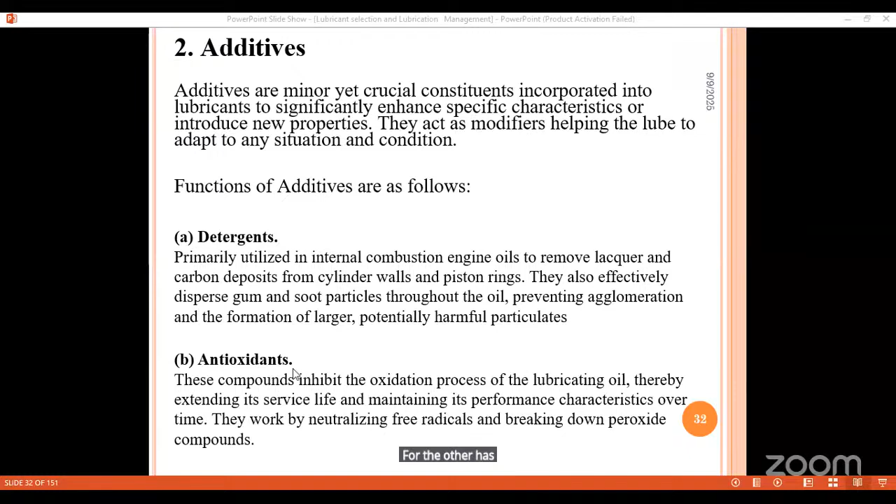The next additive is anti-wear agent. This will stop the wear, the corrosion of your metal or surface. When this is added to your oil, there will be no wear anymore. These additives improve the oil's resistance to wear and scuffing by forming a protective film on metal surfaces. They reduce equipment wear, prevent seizing or sintering, and are particularly crucial in high pressure and high temperature applications. The next one is oiliness agents.

Oiliness is also known as friction modifier. They help to prevent friction—these additives reduce the friction coefficient and enhance lubrication performance by forming a tenacious adsorbed film on metal surfaces. This film provides boundary lubrication under severe operating conditions.

The next one is metal deactivators. They form a passive film on metal surfaces to minimize the corrosive impact of the oil on the metal and inhibit the catalytic oxidation of oil by metal ions. This is particularly important in systems containing copper or its alloys. Metal deactivators almost perform the same function as anti-wear agents, but anti-wear is for every metal, while metal deactivators are for specific non-ferrous alloys like copper, bronze, brass, and even aluminum.

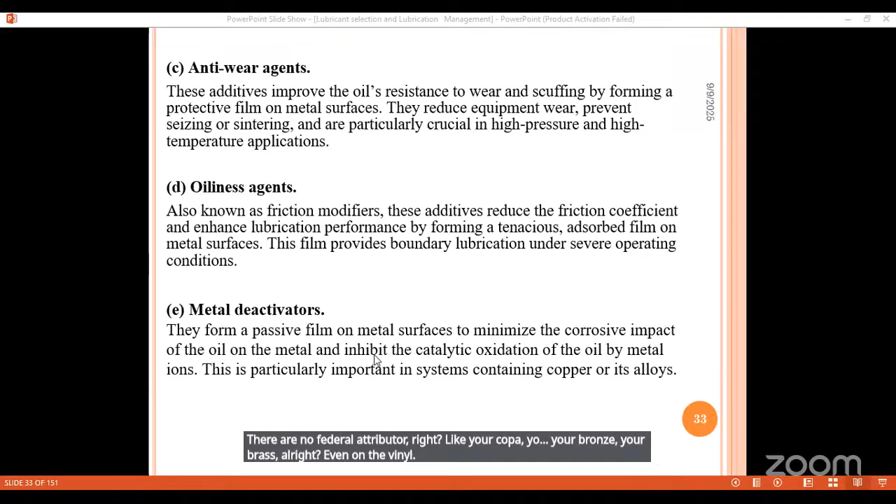Viscosity index improver. Viscosity index is the ability of your oil to withstand a wide range of temperature variation. This improver helps the oil, which was only able to withstand between 0 and 30 degrees centigrade, to now withstand between 0 and 50, and so on. That means it has improved the oil's viscosity index, telling the oil the range of temperature it can withstand. These polymeric additives increase the oil's viscothermal performance, expanding at higher temperature, counteracting the natural tendency of oil to thin out, thus maintaining adequate lubrication across a wide temperature range.

Then rust inhibitor, I'm always saying this one, right? But they are metal specific. They have metals that you can use them for. These additives act upon the metal surface to prevent rust or corrosion when in contact with water.

They form a protective water barrier. Then pour point depressant. When you say pour point, this is the temperature at which a liquid will begin to start flowing.

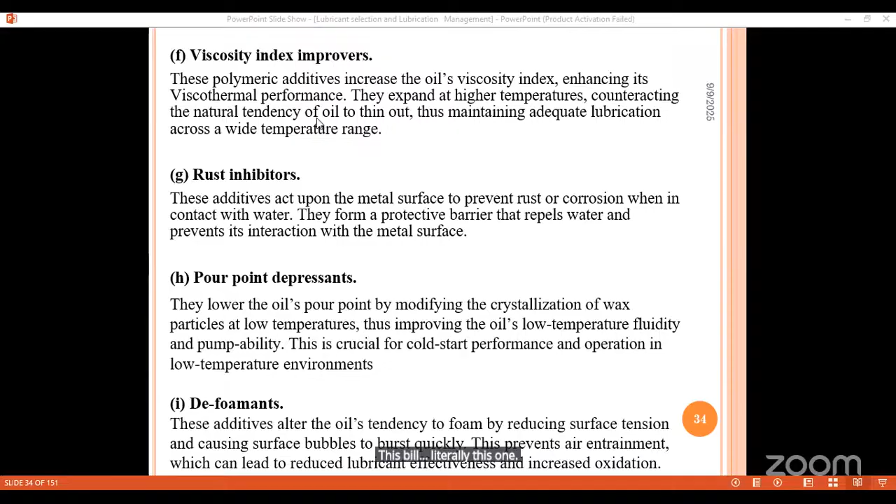Let's do the next one: emulsifier and anti-emulsifier.

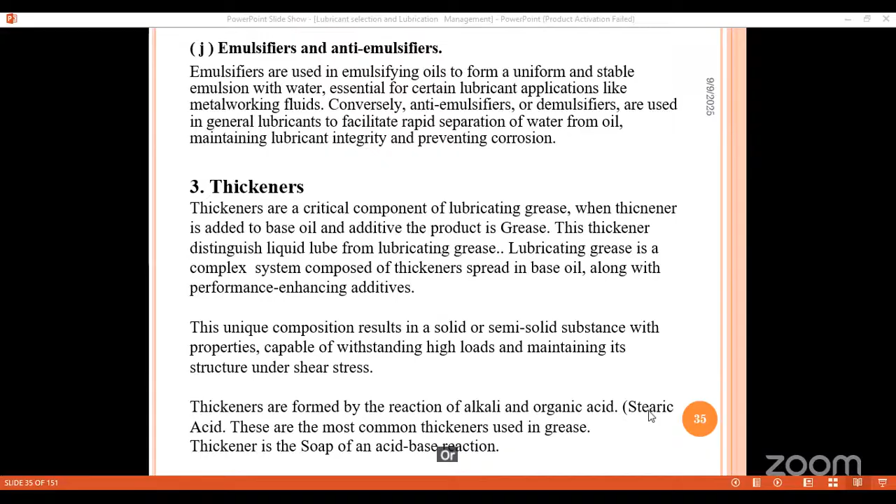Thickener plays many roles in grease formulation, significantly influencing several key properties. One of such roles is consistency. Thickeners determine the grease's firmness and flow characteristics, typically measured by NLGI. Drop point is the temperature at which the grease transits from solid to liquid state, crucial for high temperature application due to high drop point, and the ability to repel water and maintain its structure in wet environments.

How does this thickener do that? It acts as a protective layer, a coating. The oil is inside the thickener. The grease you are seeing, the oil is inside, and it is that oil that does the lubrication. The thickener only helps by acting as a container, the same way you have your sump, that is how you have your thickener. Thickener acts as a container that houses the oil. It only provides the oil when lubrication is needed. After lubrication is completed, the thickener will absorb the oil back again and store it.

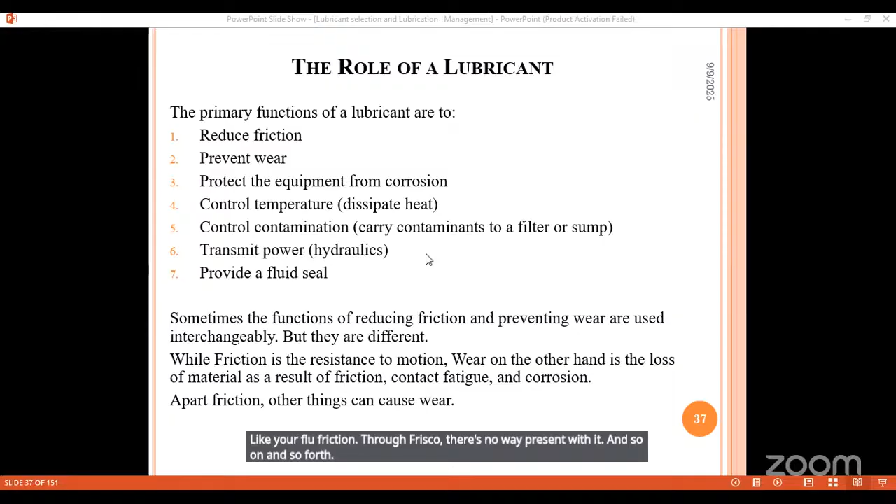The role of a lubricant continues. There is a significant difference between friction and wear. In fact, not all that causes friction can cause wear, like fluid friction. We have sliding friction, rolling friction, and fluid friction. Only sliding and rolling friction can cause wear.

Fluid friction cannot cause wear, and not all that causes wear can cause friction, e.g. cavitation erosion — this doesn't cause much friction. This is cavitation erosion. When there's air in your system, it can begin to attack the inner structure. Erosion is just like corrosion — corrosion attacks the external part, erosion attacks the internal parts, as in your pipe. What happens on the external part of your pipe is corrosion, but what happens internally is erosion. They are both forms of wear.

Reducing friction is a key objective of lubrication, but there are many other benefits. Lubricating films can help prevent corrosion by protecting the surface from water and other corrosive substances. Lubricants help in controlling contamination within systems, working as a conduit that transports contaminants to filters where they are removed, as I've said before.

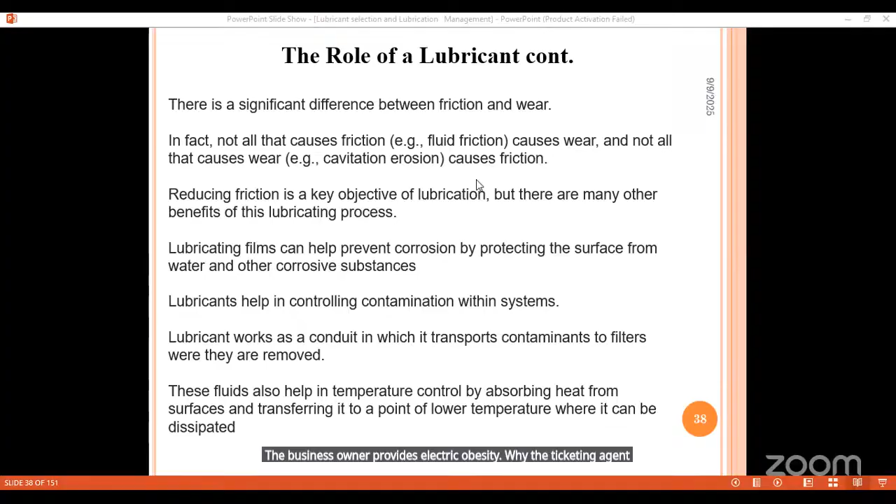Understanding how grease works is vital to determining its suitability for specific applications. Here is a brief overview. Grease consists of base oil and a thickening agent. The base oil provides lubricity, while the thickening agent gives grease its semi-solid consistency. When grease is applied to the surface, it forms a film. As the equipment operates, the grease film slowly releases the oil, ensuring continuous lubrication, and any excess oil released by the grease film is reabsorbed by the thickening agent.

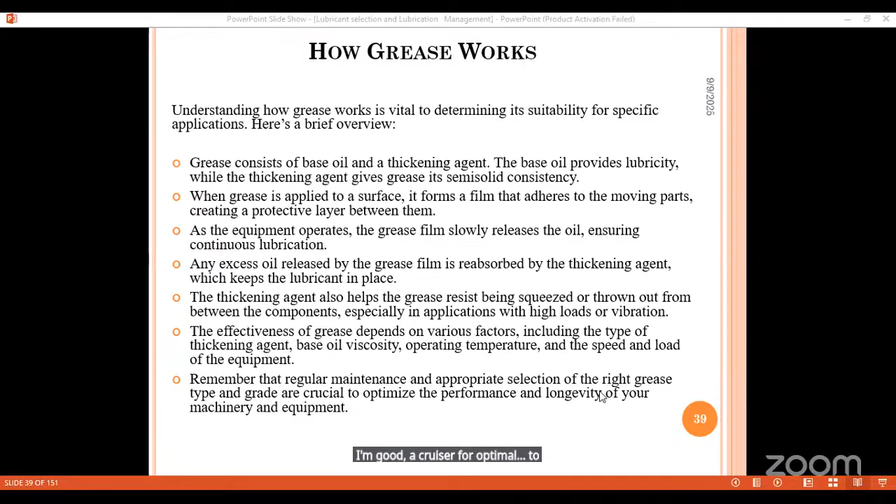I said, remember, on item 3: regular maintenance and appropriate selection of the right grease and grade are crucial for optimizing the performance and longevity of your machinery and equipment.

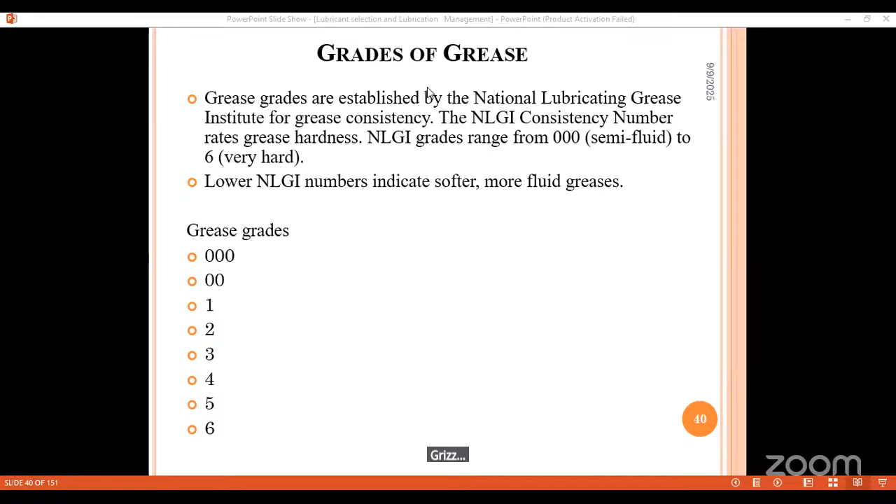Then the next slide, grease grades. Grease grades are established by the National Lubricating Grease Institute for grease consistencies. The NLGI consistency number rates grease hardness. NLGI grades range from 000, semi-fluid, to 6, very hard. Lower NLGI numbers indicate softer grease, while higher numbers indicate a more solid grease.

When the number is from 000, 00, 1, up to 2, they are more of a soft grease, almost liquid-like. This is grade 000, grade 00, grade 1, and grade 2 - these mean the grease is almost liquid-like. Sometimes you don't need a brush to apply them, you pour them. Especially when it's 00 and 0, EP1, EP2.

We also have EP, that's extreme pressure: EP000, EP00, EP1, EP2. But we are not putting the EP prefix; we assume we already know that's how grease is categorized. So EP000 to EP2 are very, very soft grease, almost like liquid. We use them where we have an automatic system of grease application.

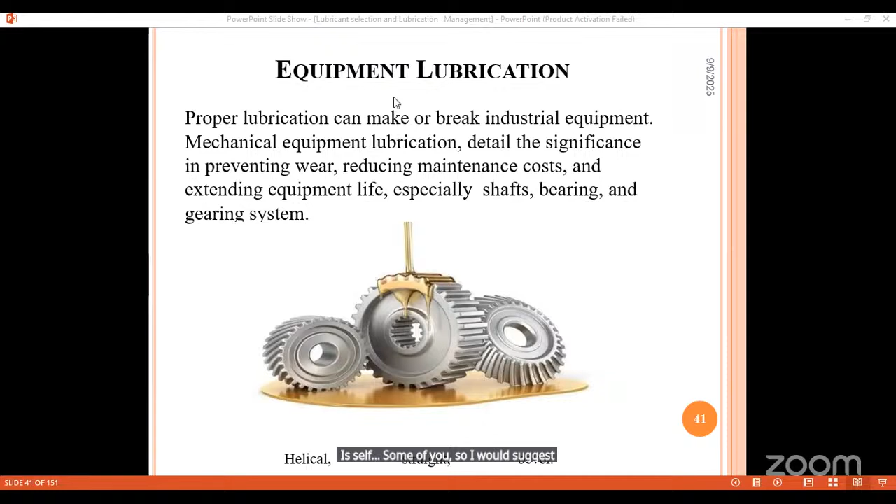Thank you, sir, yes, for the wonderful and insightful session. Yes sir, we're excited. Network wasn't much of a problem. Okay, please if you have any questions, raise your hand and ask, or send it to the chat box and it will be addressed by the trainer. Thank you very much. So who is answering the first question?

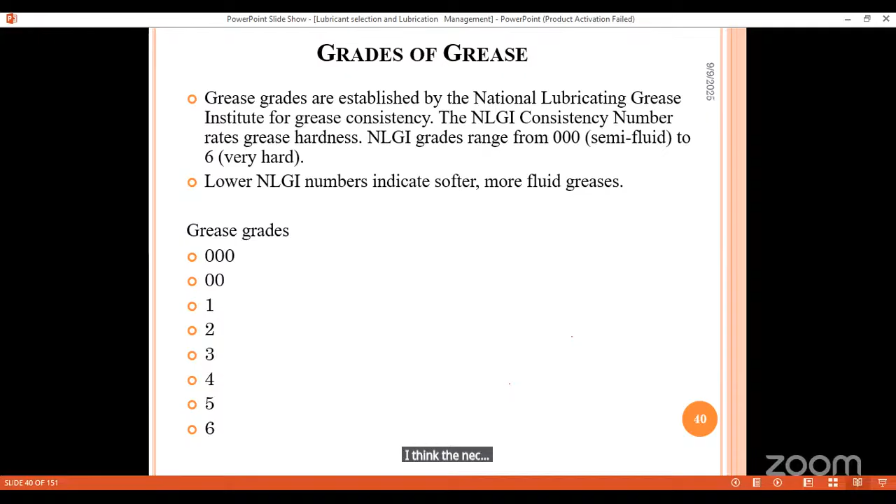Okay, can you hear me? Your question is how do I know the oil or lubricant I should use for my equipment, am I right? That would have been tomorrow's topic where we are dealing with lubricant selection, but since you have asked a question, I will just give you a piece of the iceberg of what we are expected to know tomorrow.

We have three things to control. How that is... I'm hearing myself. Can you hear me, sir? I can hear you, sir.

Okay. The first thing you consider is what the OEM advises you to use, that's the first one. The next one: even though the OEM says use that kind of oil, the environment you are working in, the atmospheric condition of that environment, will also play a role in what you will use.